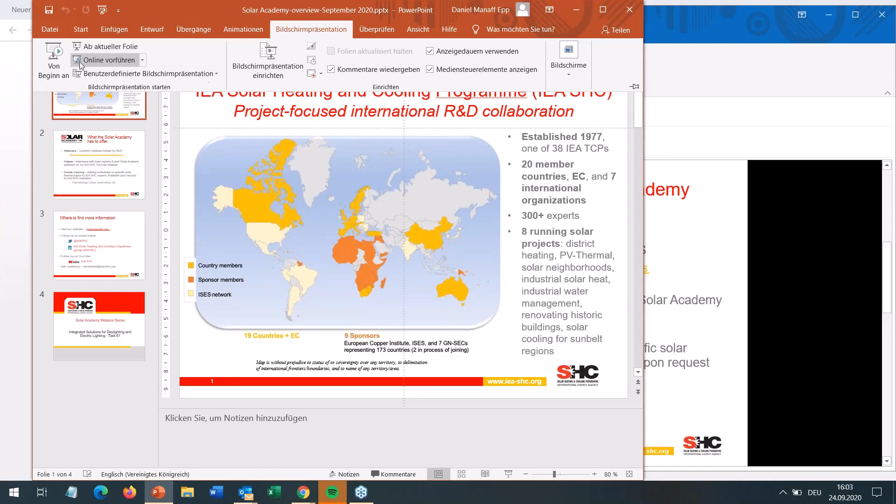The IEA Solar Heating and Cooling Program, SHC, is a collaborative research platform, really huge, with over 300 experts from around the world, from 20 member countries, the EC, and 7 international organizations. We currently have 8 running research projects, and they cover a wide range of topics which are all linked with efficiency and solar energy: district heating, PV thermal, solar neighborhood, industrial solar heat, renovation of buildings, and solar cooling for Sunbelt regions.

What we offer as Solar Academy is regular webinars. They are hosted with ISES. You're hearing one today, and you can find all the recordings of previous webinars under this link. Also, we offer videos on the YouTube channel, which we have done with experts at conferences or around Solar Academy webinars. And we offer on-site training available on request by IEA Solar Heating and Cooling member states—the last trainings were in China, South Africa, and the UK.

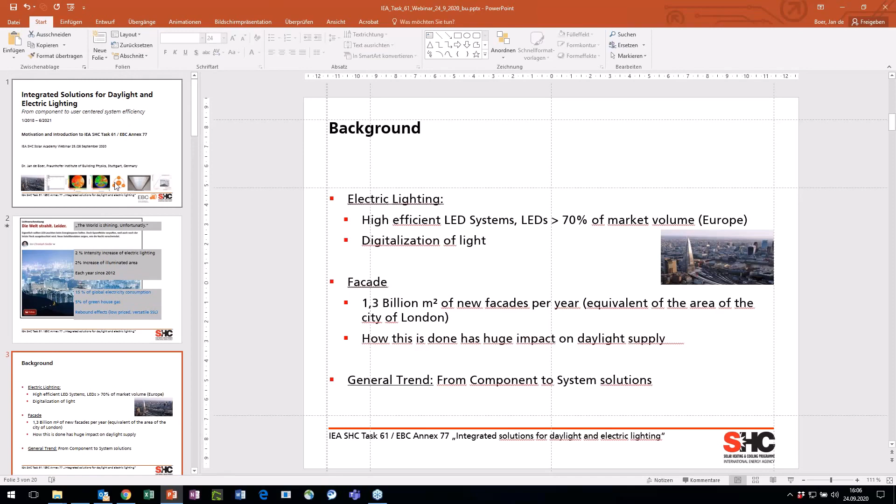Let me first of all start with lighting in a little bigger context, bigger picture. We still, like with other resources, see that lighting consumption is still growing.

From satellite images it's been deducted that we still see huge increases since 2012. One study showed that we have 2% intensity increase of electric lighting and 2% increase of illuminated area on a global scale, showing that this is still ramping up.

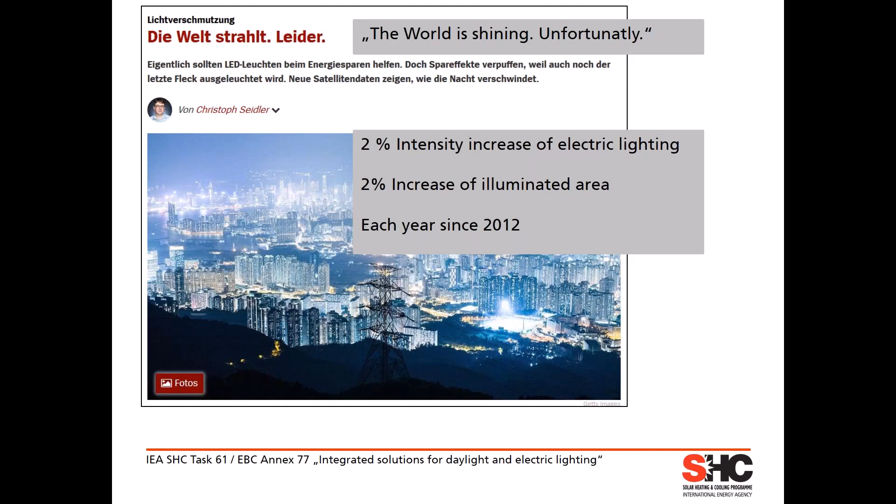We know, relating it to energy consumption, that for lighting we need around 15% of global electricity, and also that lighting accounts for around 5% of greenhouse gases. So lighting and energy efficiency definitely is a topic we have to look into.

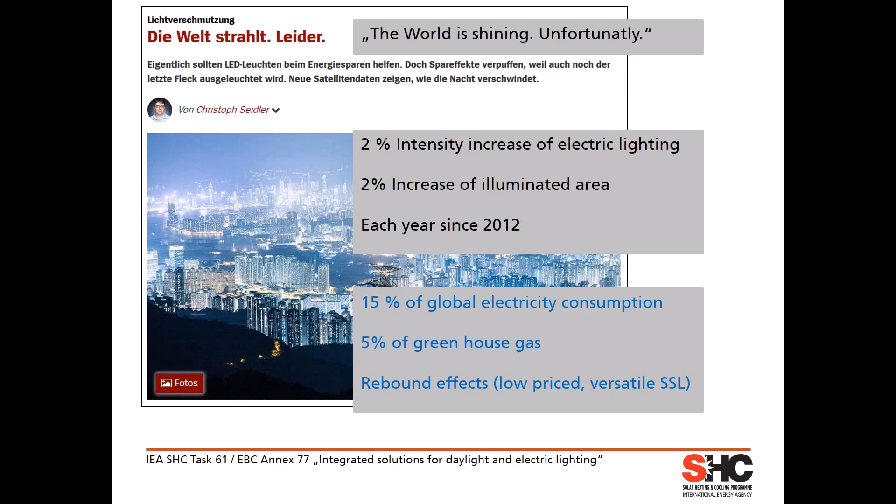Looking a little into the market, we all know about very efficient SSL systems, LED systems now around, but nevertheless we are seeing worldwide effects of so-called rebound effects. Low price and very versatile LED systems are being used more and more, in parts compensating the efficiency gains we got. A little on the background of the markets we are in.

It's on the one hand side electric lighting. We went through a transition of technology here, around 70%, an estimate of market volume now in Europe in LED technology, replacing, of course, older technologies. We have an efficiency boost here, LED systems around twice as efficient as the formerly used fluorescent lamp systems.

And now the next step in electric lighting is very much into the digitalization of light. So you're getting more features, more functionality in parts for less money. It's a very dynamic change and transition we are in here currently.

The other aspect we're dealing with is the facade, and thereby the facade influencing the daylight supply in buildings. The facade market, we have around 1.3 billion square meters of new facade put up each year. That's an amazing number — it corresponds equivalent to the area of the city of London. That is being put into place year by year.

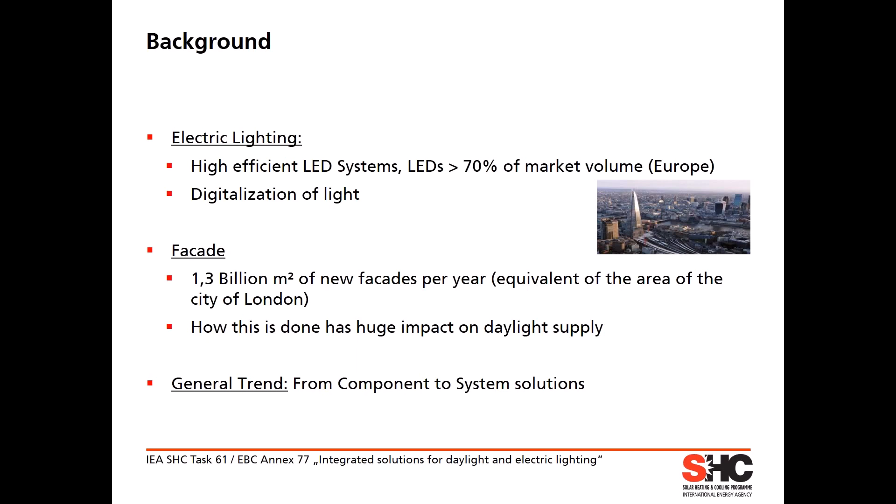This, of course, has a huge impact on the daylight supply and therefore the lighting conditions in interior spaces. Generally, we see the trend that we are moving from component development more into system solutions, trying to optimize the integration of different components.

That is bringing us basically to the topic of our working program that we are addressing here: open issues in the integration of day and electric lighting. That is addressing user aspects, it is addressing energy efficiency of these combinations, it is addressing the technology side, and also market aspects for industry, but also for design practice.

Just to give you a couple of ideas which we addressed in the beginning of this activity to have a closer look into, is definitely the side of the user perspective. We are seeing changes in design and control parameters as we are understanding better and deeper that we not only have to meet visual but also non-visual effects.

When we're designing lighting installations, we have to tailor lighting systems to different ages of people, of users of spaces, and this of course then has implications that we have different and additional targets in lighting designs.

For instance, we might see higher illuminance levels part of the time in the future in indoor spaces. That goes along with the question of whether we necessarily need higher energy demands and consumption for this, or if we can solve it smarter by, for instance, using more daylight.

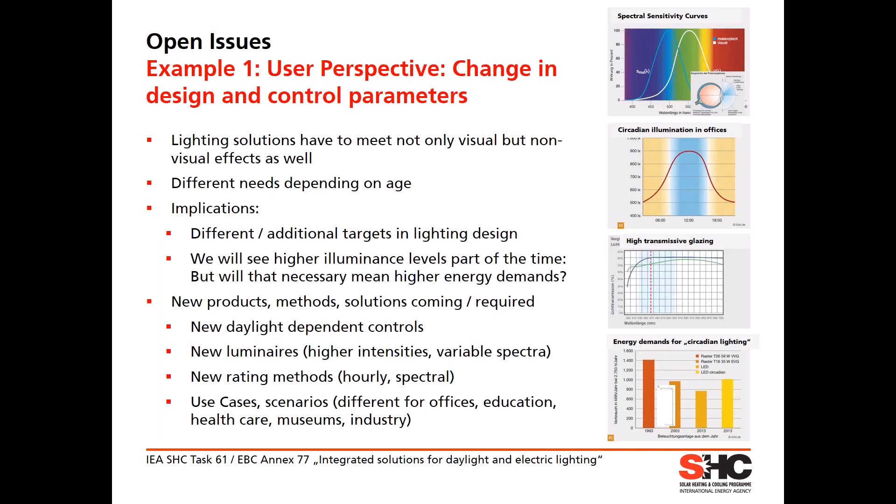It has implications on new products, methods, solutions coming up, new control strategies, new luminaires, or also new rating methods we are seeing coming up.

Another issue is the integration of lighting environments in indoor spaces, bringing together the light coming from the facade through the sun shading, through the glazing systems, with electric lighting.

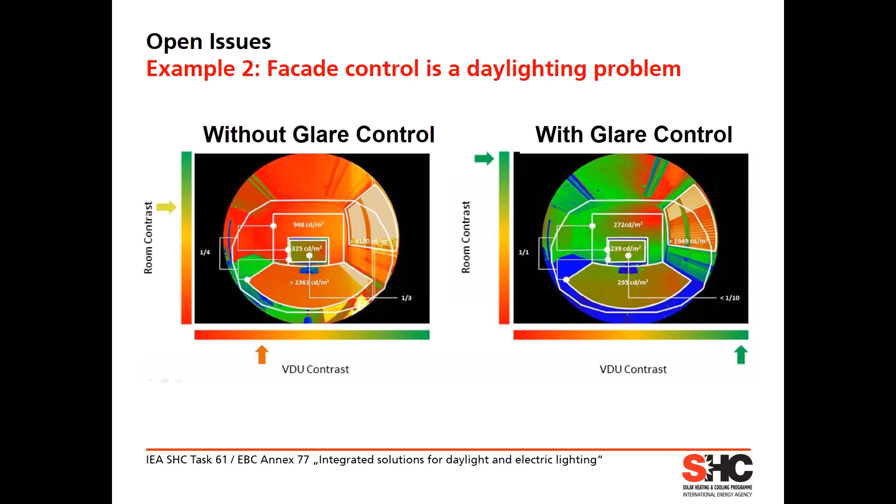That has up to now very much been driven from the facade side by solar controls, and lots of studies show that when people are actively doing something with switching their facades, their sun shading systems, they are doing it for lighting reasons and not for thermal reasons.

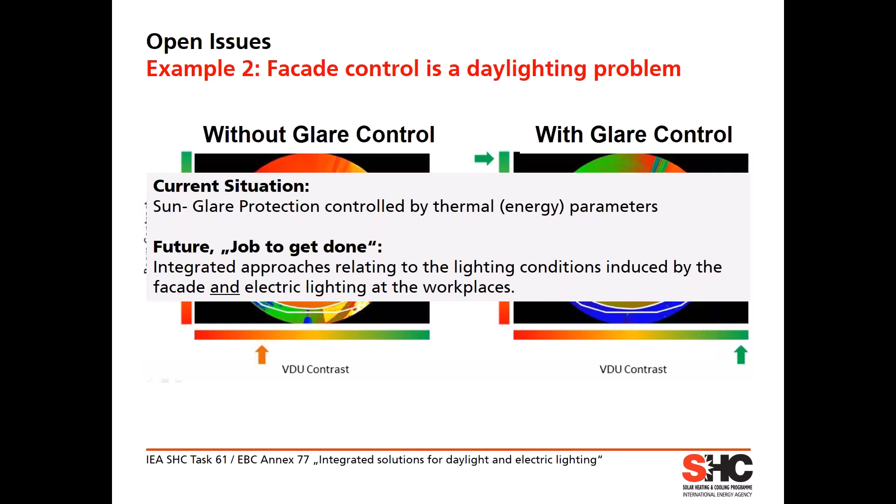So the job to get done is to integrate these approaches better and bring electric and daylighting aspects better together at workplaces. The third issue is on the technology side.

Today we know that we are having technically quite many solutions at hand. Almost everything is technically possible, but will that be accepted? So the key question here is: is the technical complexity also increasing the efficiency?

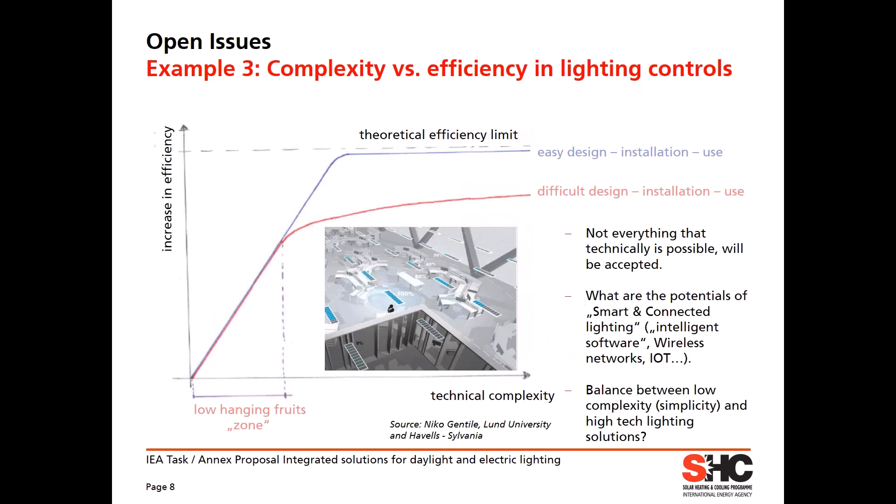If we're having a difficult design, difficult installation, and difficult use due to not really matched technology, will that be in the end maybe more efficient than something very easily designed, installed and used? So in the end, something very simple could be more efficient and better accepted. We think that is worth looking into.

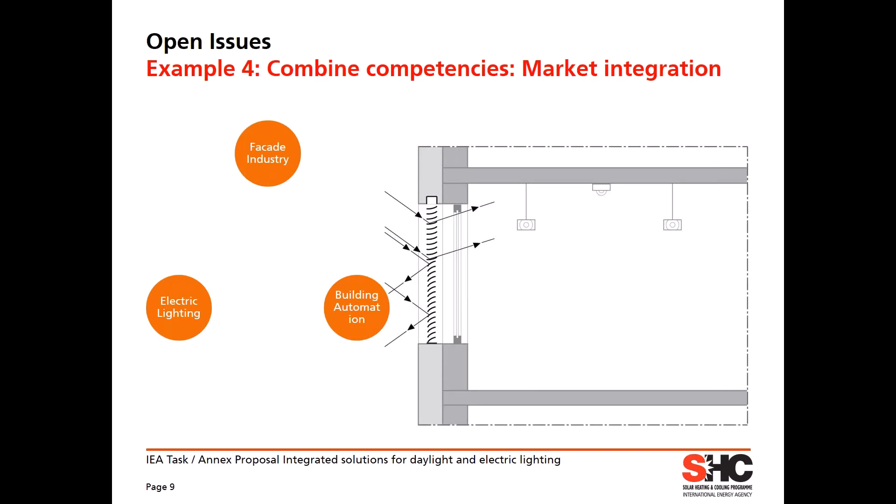Another aspect is on the market side. We are having different industries involved in lighting. That is, of course, classical electric lighting, the facade industry, and building automation.

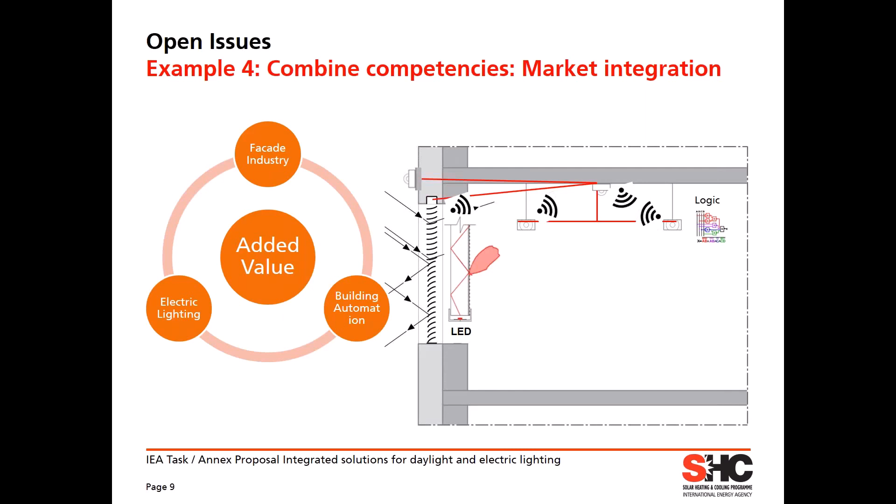We see in buildings more and more components being connected. We're seeing new function integration, for instance in facade, not only delivering daylighting but also delivering electric lighting. We think that if we bring these different trades and industries better together, we can generate quite some added value. In addition, we have to bring it into the design processes, up to the desktops of practitioners, and also put that in the context of national regulations.

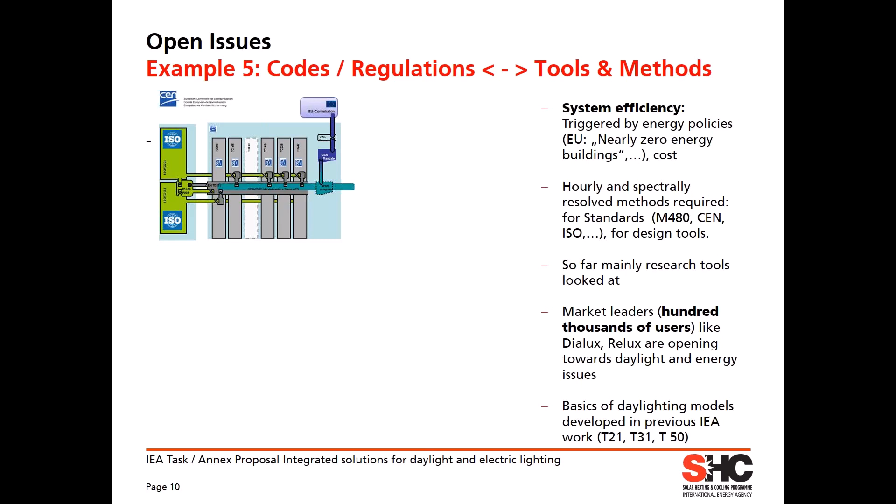There's quite a bit going on at EU level and national level, trying to bring down energy consumption as a whole. Standards are important for that, so we think it's worth developing standards further, better connecting daylighting and electric lighting aspects, for instance having methods rating things on an hourly basis. Also important is the improvement of design and rating tools, possibly including the market-leading simulation tools, closing gaps which still exist on the daylighting and lighting control sides.

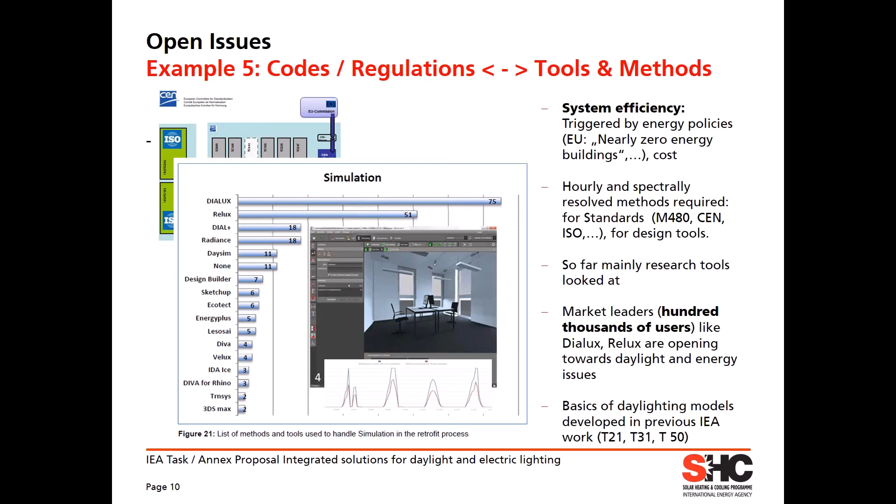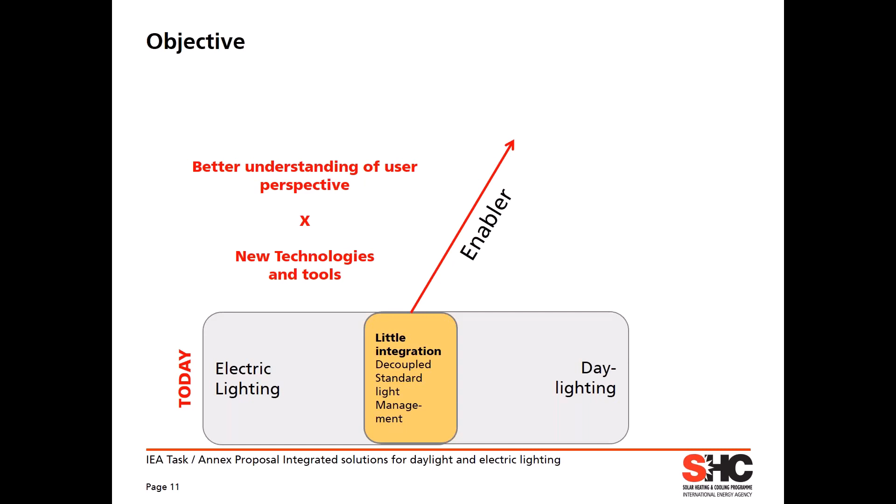So that's another aspect we're looking at. Altogether, we're trying to push the integration of electric lighting and daylighting by using these enablers: better understanding of perspective, and new technologies and tools. We hope that with our program we can contribute a little to higher integration of user-centered lighting at high system efficiency, implementing daylight as a template for electric lighting solutions, and also linking market and industries better.

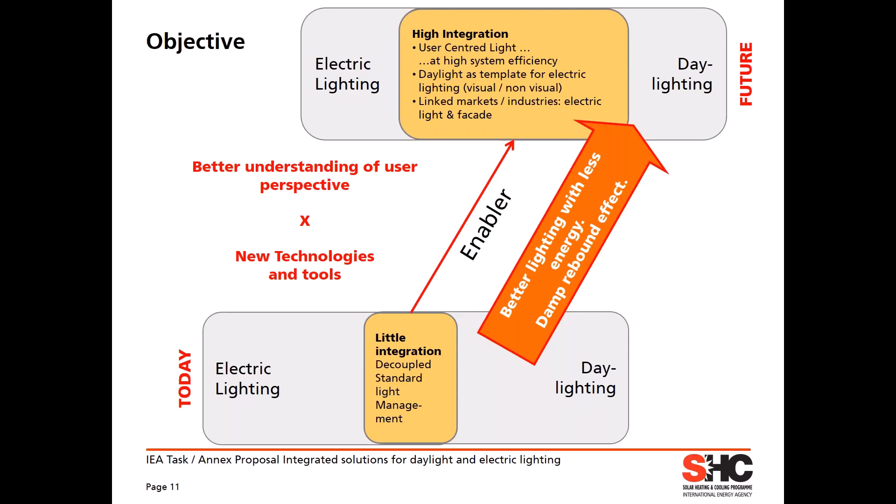In the end, we're hoping to give a little push at least for more energy efficient lighting and damping these mentioned rebound effects. The task structure we've given ourselves is basically four main projects.

Subtask A deals with the mentioned user perspective and requirements. Subtask B is on the technology side, integrating and optimizing daylighting and electric lighting. Subtask C deals with tools, design support, and design workflows for practitioners. And in Subtask D, we're doing validation in demonstration projects, lab and field study performance tracking.

That's all cross-connected by two activities: the development of a new evaluation and rating method for integrated lighting solutions, becoming part of an ISO standard, and also going into widespread lighting design software, and a VR-based decision guide, on which Mark is going to talk a little deeper in one of the next presentations.

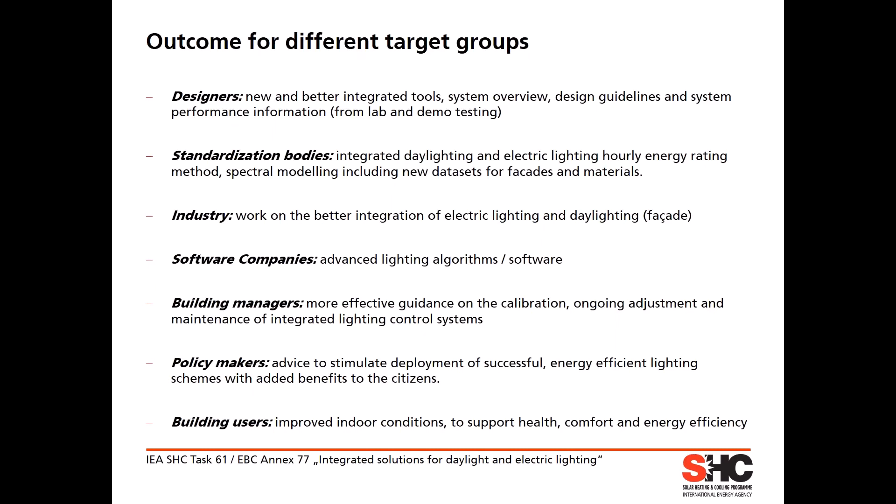In the end, we are producing results and publications for different stakeholders: designers, standardization bodies, industry, software companies, building managers, and policymakers. Hopefully, for building users we can improve indoor conditions, support health, comfort, and of course energy efficiency with this program.

To give you a brief idea of who is behind this activity, as Bärbel mentioned, it's a quite big research group of around 35 experts from 14 countries, coming from research institutes and industry at the same time.

We have early publications out, for instance a position paper on the use of daylight in non-residential buildings, giving indications of actions eventually needed for governments, NGOs, and the private sector.

We have the first reports from the research program out now. More are coming up during the next year as we're in the final year, and also a newsletter is available. If you're interested, you're cordially invited to follow us on the website of Task 61. The publications coming up will be available and downloadable from this site.

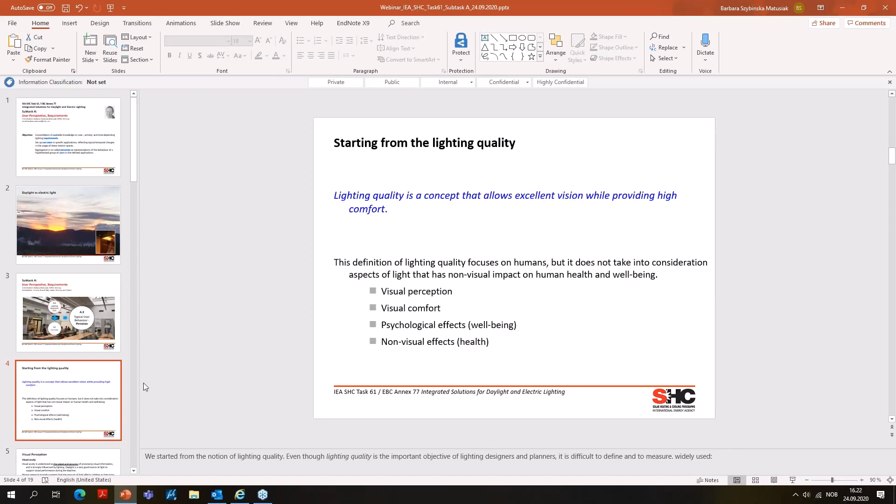So what we learned so far from the research studies: visual acuity. Recent research strongly suggests that the amount of light affects children as they grow and determines whether they will develop myopia or not. Myopia, or short-sightedness, is the most widespread visual disorder affecting young people. It has reached an epidemic level in Asia and is increasing everywhere. Some studies refer that the risk of myopia is lowered by exposure to daylight and increased by activities performed at short visual distances, close-up work. A person with little exposure to daylight has a 5-fold risk of developing myopia.

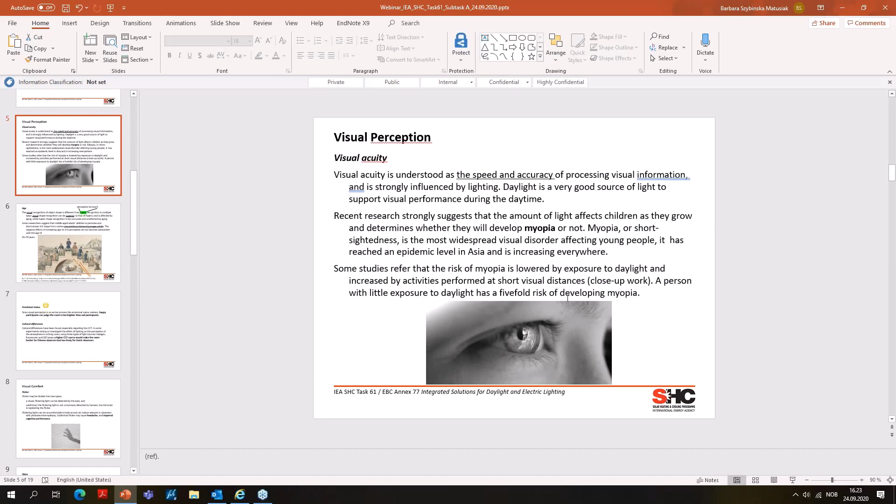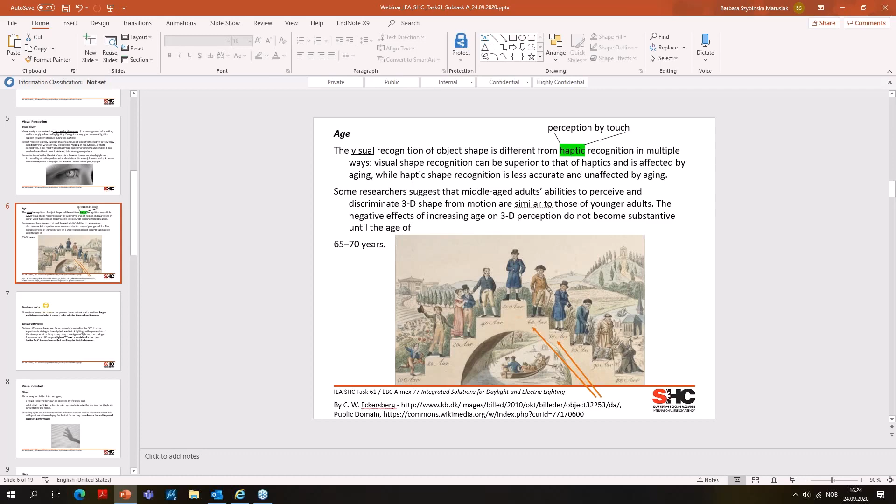What we learned about age: the visual recognition of object shape is different from haptic recognition in multiple ways, and visual shape recognition can be superior to that of haptics, and it's affected by aging, while haptic shape recognition is less accurate and unaffected by aging. Even though some researchers suggest that middle-aged adults' abilities to perceive and discriminate three-dimensional shape from motion are rather similar to those of young adults. So the negative effects of increasing age on 3D perception do not become substantive until the age of 65-70 years.

What about emotional status? Since visual perception is an active process, emotional status matters. Happy participants can judge the room to be brighter than sad participants. And we found cultural differences, especially regarding the color temperature of light.

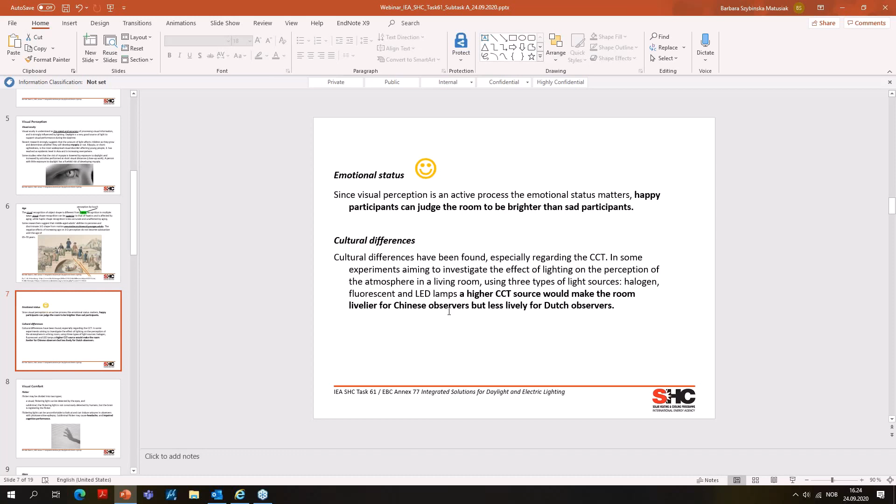In some experiments aiming to investigate the effect of lighting on the perception of the atmosphere in a room using 3 types of light sources, a higher color temperature source would make the room livelier for Chinese observers, but less lively for Dutch observers.

Flicker may be divided into two types: a visual flickering light can be detected by the eyes, and subliminal, where the flickering light is not consciously detected but the brain is registering the flicker. Flickering lights can be uncomfortable to look at and can induce seizures in observers with photosensitive epilepsy. Subliminal flicker may cause headache and impaired cognitive performance.

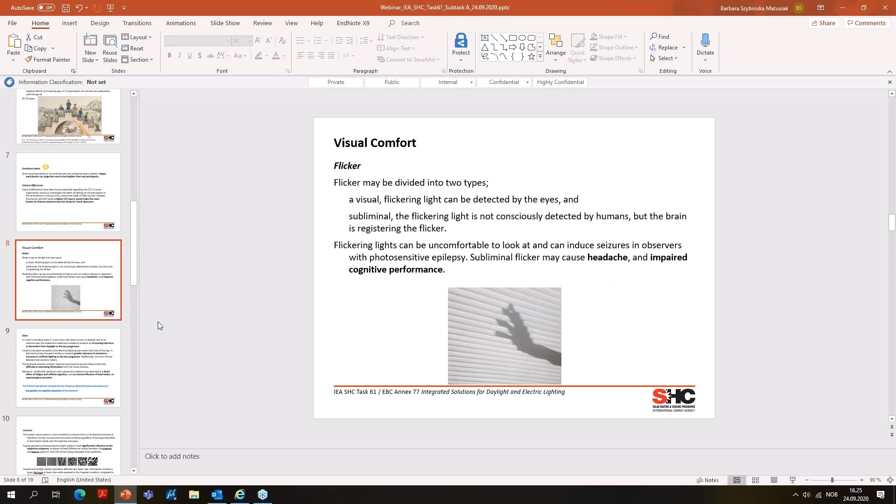Glare: in a semi-controlled study in a test room with direct access to daylight and an external view, the researchers detected a tendency toward increasing tolerance to discomfort from daylight as the day progressed. It seems that glare sensation from electrical light also varies with time of day. A laboratory study showed a tendency toward greater tolerance to luminance increase in artificial lighting as the day progressed.

Additionally, the time interval between sessions matters. The temporal variation of glare response was also found to be influenced by the difficulty of extracting information from the visual stimulus. Moreover, statistically significant and substantive evidence was detected of a direct effect of fatigue and caffeine ingestion, and an inverse influence of food intake, on reported glare sensation. The factors that almost certainly do not influence discomfort glare perception are gender and optical correction.

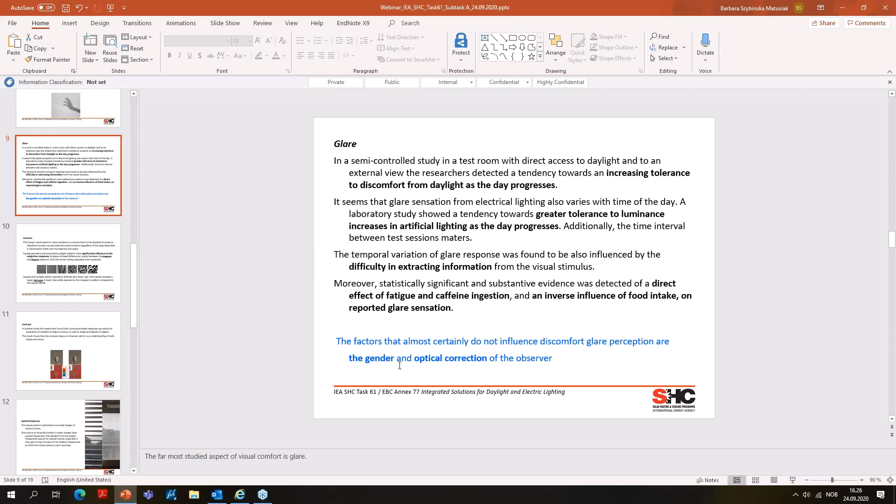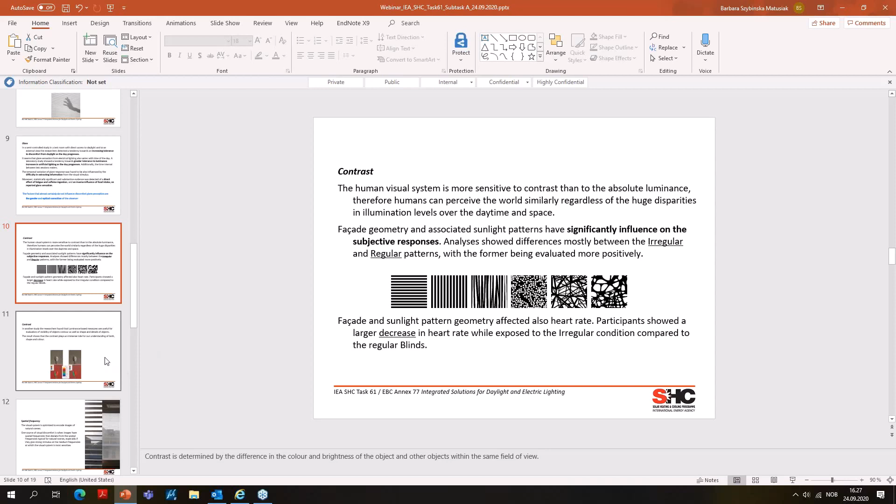Contrast can be measured by luminance ratio, and we can look at spatial frequency. The visual system is optimized to encode images of natural scenes. So one source of visual discomfort is when images have spatial frequencies that deviate from the spatial frequencies typical for natural scenes.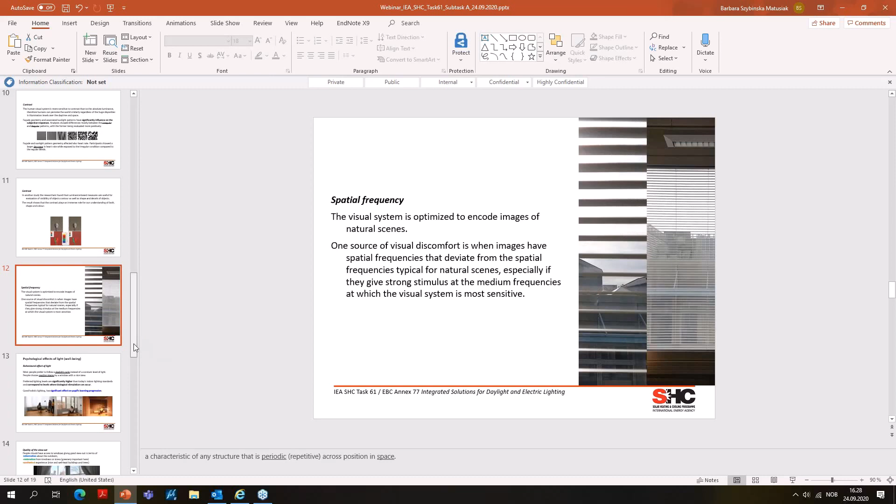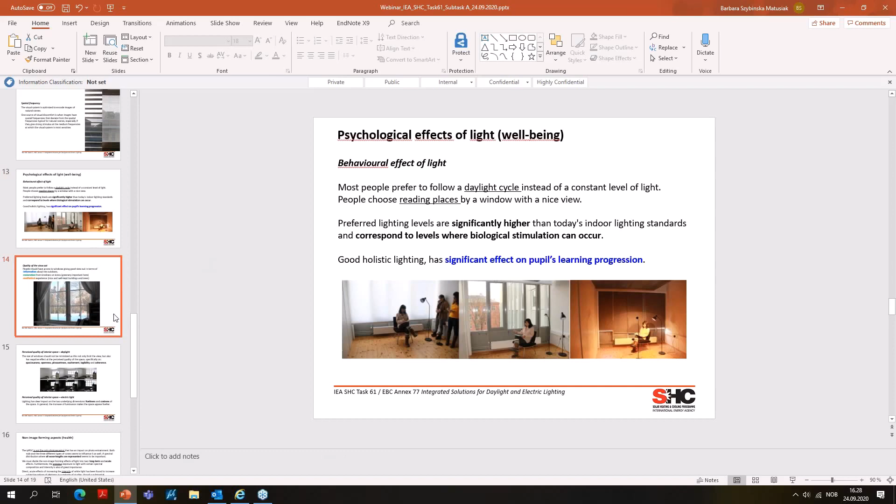And then we can look at behavioral effects of light, how people use it and what sort of lighting they prefer. We can again repeat that people should have access to windows giving a view, because of information, restoration, and aesthetic issues. And the window size should not be limited, not only because of limiting the view, but also because window size has an effect on spaciousness, openness, pleasantness, excitement, and legibility and coherence of the room.

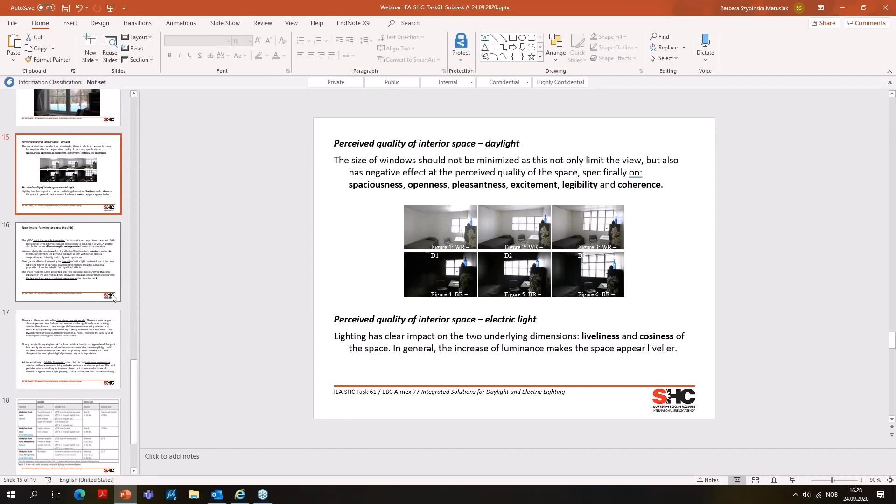I also have a quite long series of information about non-image forming aspects. Maybe the most interesting is that there are differences related to chronotype, age, and gender. There are also changes in chronotype over time. Girls and women seem to be significantly more morning-oriented than boys and men. Young children are more morning-oriented and become rapidly evening-oriented during puberty, while the more attenuated turn toward morningness occurs from the age of 20 years, and it's more stable. And elderly people display a high risk for disturbed circadian rhythm.

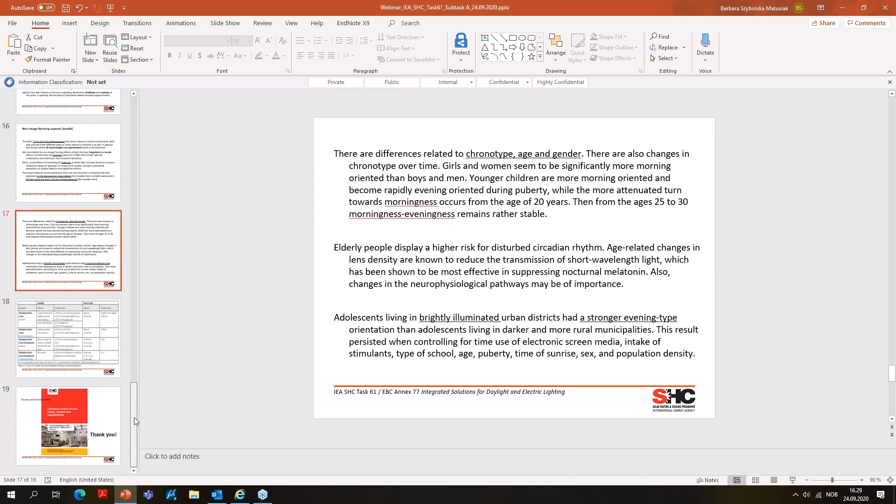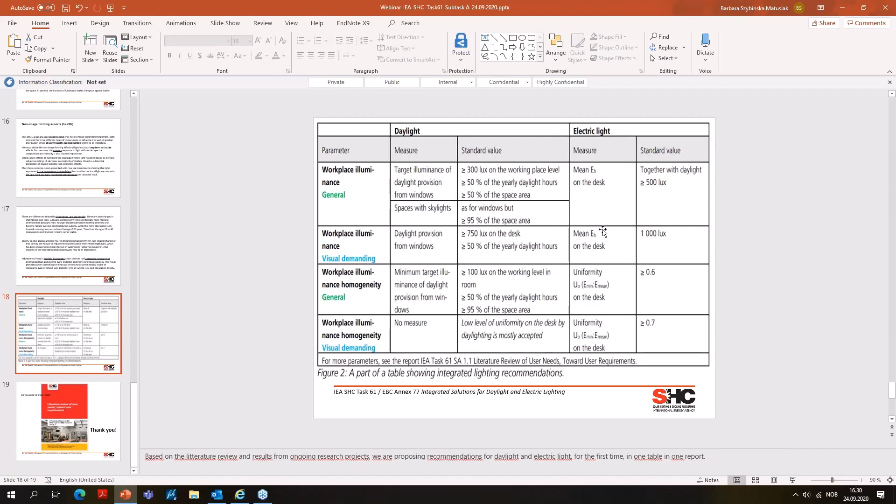So, based on the literature review and results from ongoing research projects, we are proposing recommendations for daylight and electric light for the first time in one publication and in one very long table. A part of the table you see here: we have daylight and electric light, and for example workplace illuminance in general, what are the recommendations here, and for electric light as well, for visually demanding tasks, and so on. So I recommend this if you would like to know more about human needs and recommendations.

So the report, which we call A1, will be published very soon, probably already in October. Yes, thank you very much.

Great, thank you, Barbara. Very impressive, very nice to see lighting and health being linked by researchers, and even looking into gender aspects. Thank you very much.

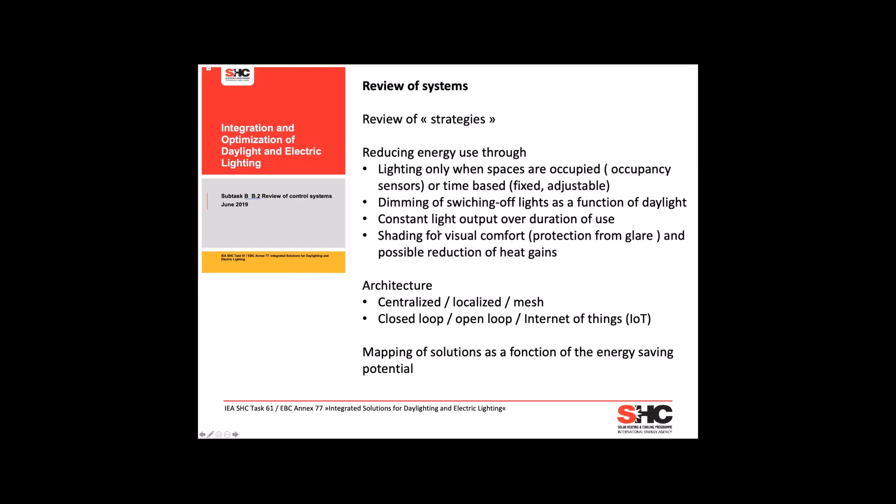I don't want to cover all that. I know some of you, or most of you, are expert in that. So you know the supply is impressive, from centralized system, closed loop, open loop, to the type of sensor you're using.

We're also reviewing the market structure, depending if it's residential or non-residential, which are very different markets for the application. And you have drivers like in individual buildings, very much related, for example, to security issues. Often it's much more related to heating problems, overheating, whatever, and lighting is just a second aspect. So it's hard to really fully link the control technique to only lighting quality. It's a bit more global in buildings.

We also see movement and changes, a lot of protocols of communication, and this shows that lighting control is part of a more global system. Often if you have a very well developed BMS, the lighting control is only part of it and could be cheap with few sensors. So you have a whole range of control, from fully dedicated to lighting to completely integrated in BMS.

And now with the data architecture coming into buildings, data systems like PoE, Power over Ethernet, can even light the lamps. We have two IEEE standards on this, PoE 100 watt system, and also the single pair approach, which we expect will also put price down for controls. We see some initiative for DC powered lamps, 48 volts, which allows transformers to be centralized and not from every light source. New sensor systems and chips with geolocalization can really adapt lighting to your area.

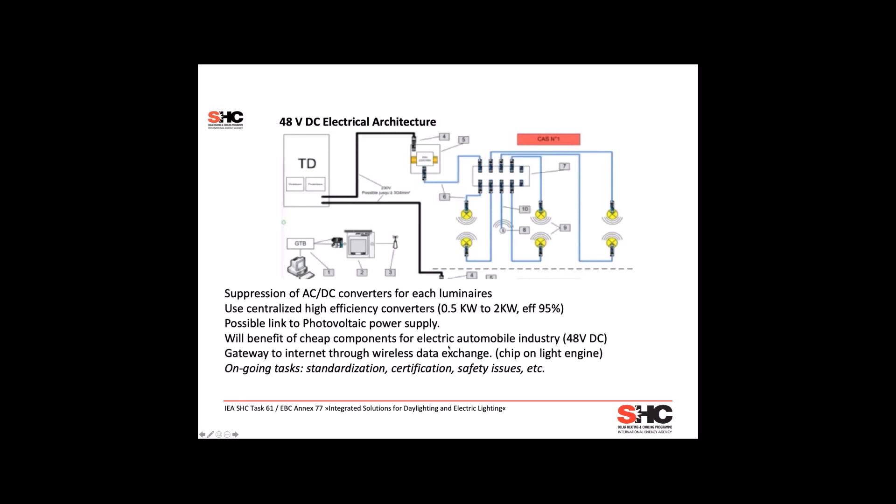I don't want to go too much into all this new proposal of architecture, but it's moving. I think some of you are probably involved with photovoltaic systems, and photovoltaics produce DC current, usually rather high voltage, but there are a number of actors that think part of the building could be powered with DC power. We also see a push from companies working for the automobile industry, especially electric cars, with components that may move to the building from the car industry. So we're checking that very important evolution which is happening.

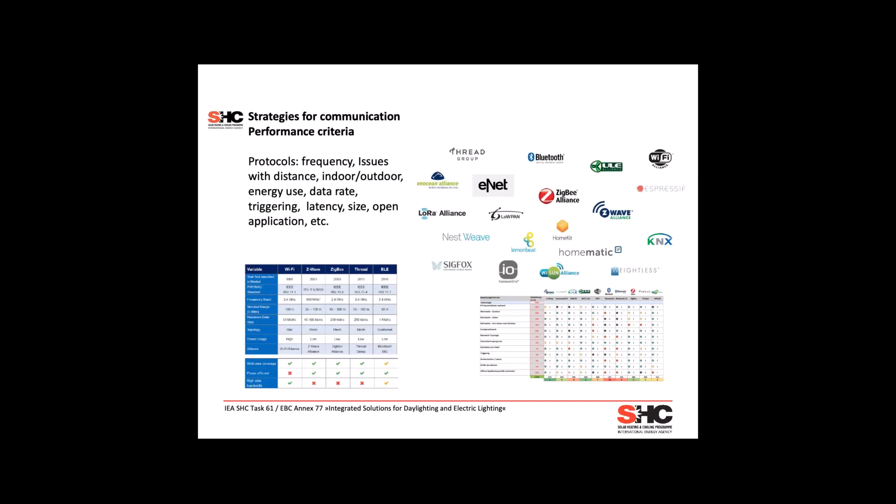We looked at a number of performance criteria of all these systems, the protocols, with their advantages and drawbacks. We also looked at future trends, based on an analysis of value creation. Part of these lighting control systems are basically solving problems today, and part of them are also creating new values, new functionalities, new opportunities to run this better. This is something we have absolutely identified, and it's impressive to see how the market is pushing for development of new systems in a global manner.

Having a talk recently with people working in the car industry and the electric car industry, which is very much driven partly by software development, you could see that software is now moving into this lighting control business to make things versatile, practical, remote control, flexible. I have a number of terms here, and that's something we look at and we report on in our next report, on B3 and B4 actually.

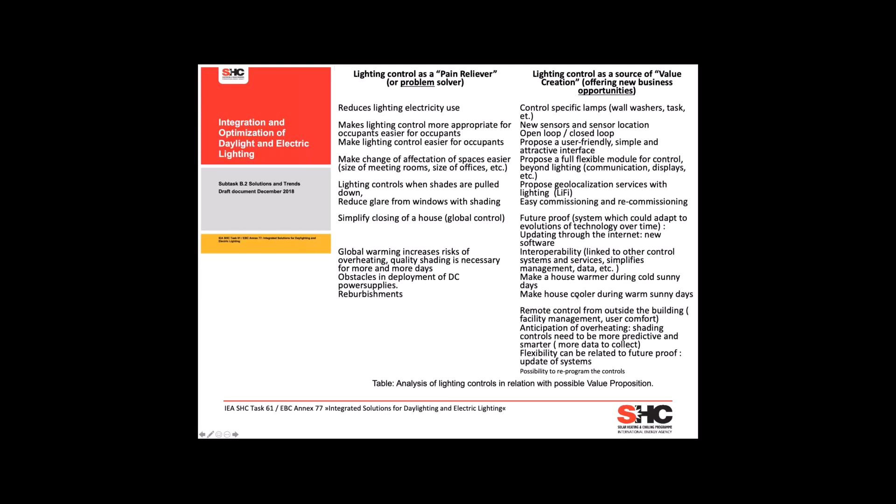We are covering user interfaces, which is impressive what is happening.

It could simplify the world, making a global management of buildings, hospitals, schools, commercial centers, or your home more practical, but we're also very concerned by the robustness, the simplicity, the commissioning, and the maintenance. Components are progressing, are being shared, and we check the trends on that.

We try to really look at what the systems are really doing for energy savings, because the motivation is often very far from purely energy saving. So we want to inform the readers about the potential on that.

We see something which is not so developed - combined control of lighting and daylighting is not really the core of this development, but we try to grab the systems that allow doing both. And we look at the evolution of motors, of shading systems, and electrochromic glazing, and the way they could be combined.

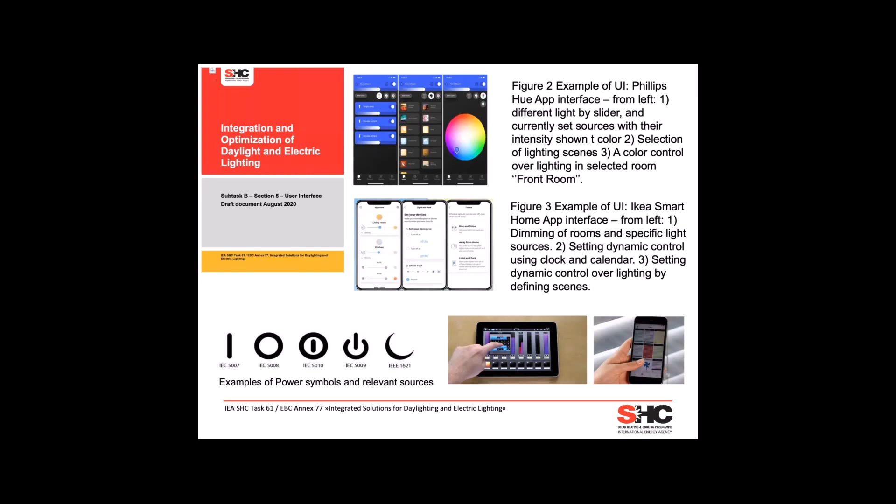We have global issues regarding that. We need to finish this document about lifetime. The model of lifetime is very important because we are talking about systems with different lifespans - the control has a life, the drivers have a life, the lamp has a life, the luminaire has a life, and we are addressing this in the report too.

Finally, we have a report on standards, because there are relevant standards, new standards being developed, and we also identify needs for new standards.

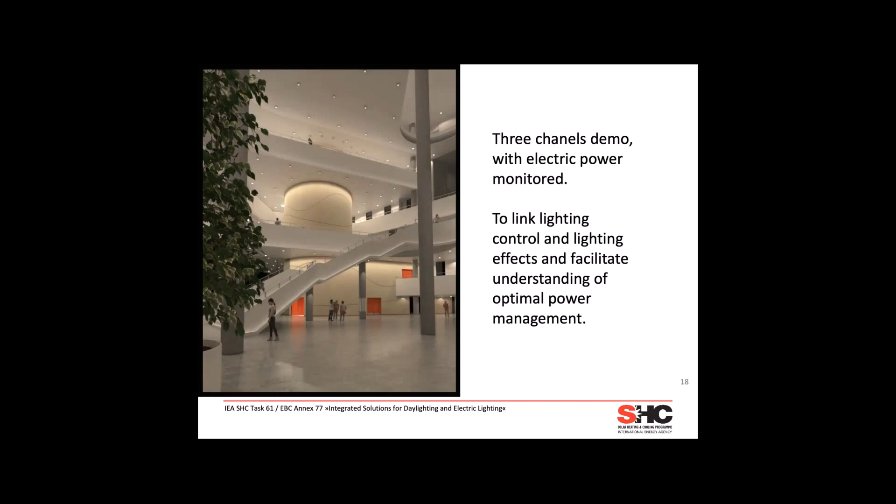I think I will have, if I could play this on my screen here. I hope you can see that on my screen. Do you see my screen? I hope so. Maybe not - yes, no, we see your screen, yes. You see your screen, okay.

So you see, you can vary the daylight in the room. We have different lighting scenarios. You can play up and down, and you can simulate actually graphically a number of lighting control systems. We plan to have a number of lighting control systems demonstrated on the website of the IEA Task 61.

Okay, this is where we are now - 5 reports. Some of them are coming soon, and we hope you will be delighted to have them and review them. Thank you very much.

Mark, thank you. This was a very engaged presentation and very impressive work. I think it might be 500 pages of technical insights on new lighting technologies. Very well done.

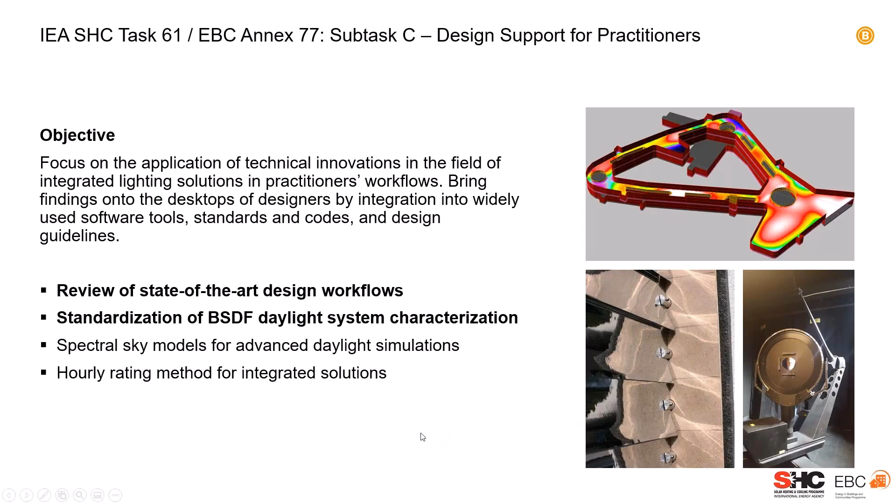So I'll give a short overview of the design workflows and the daylight system characterization topic. For the design workflows, in that state-of-the-art review, we first defined example design projects to give the reader an overview of how such systems, such buildings, such architectural designs can look like, and how the lighting design with integrated solutions for electric lighting, daylighting, and controls can look like, and what different applications can be.

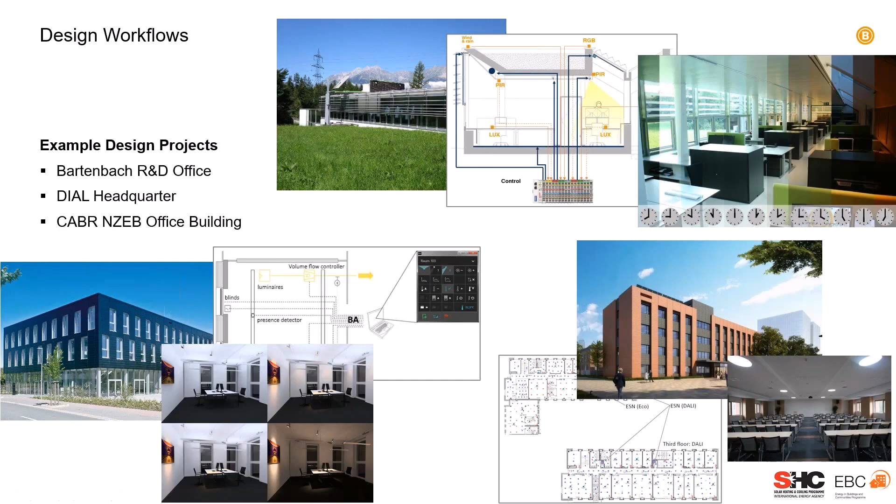So we have three different and very nice examples in there: our R&D department here at Bartenbach in Aldrans, the office building from DIAL in Germany, and the building of the Chinese Academy of Building Research, the Net Zero Energy building in Beijing.

In a second step, we gathered inputs from different groups and people joining the group about the workflows used in practice, as well as proposed workflows in standards or from public entities. For example, we have workflows that we use here at Bartenbach, workflows used by Norconsult at Inform Design at DIAL, but also workflows described that are standardized in the ISO standard 16817, or, for example, proposed by the German LiTG in their scope of services.

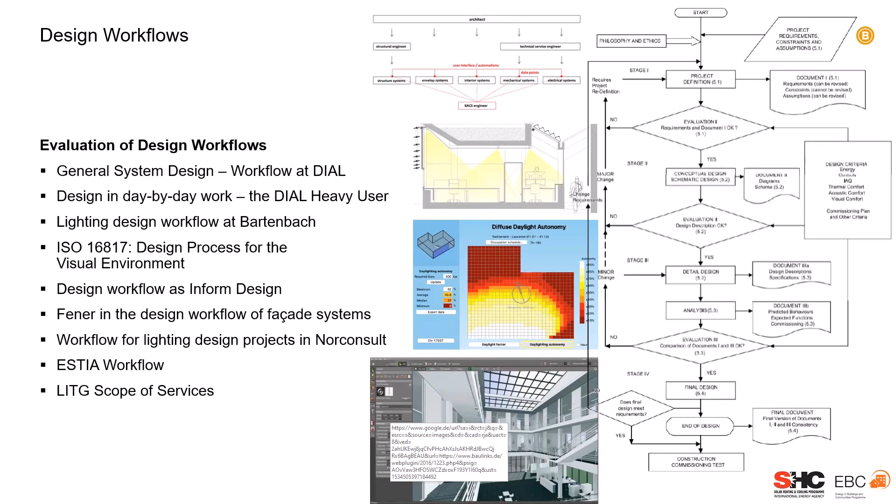Today, all design process and design workflow is tightly connected to simulations, which are either for evaluation in the end, but also often in the design process itself - if we think of parametric design, for example, as an important means of design nowadays. We also took the time to compare and put them next to each other and checked the different features that design tools provide.

There are quite a number of software solutions out there which can be used for designing daylighting and electric lighting solutions, and also the controls for these integrated solutions. We did that for different aspects used in the design process and necessary for it. We summarized general information, which kind of user group is addressed with one tool or the other, in which design phase they can be used, and so on. So we put them next to each other and got a nice overview of the current situation in terms of software solutions.

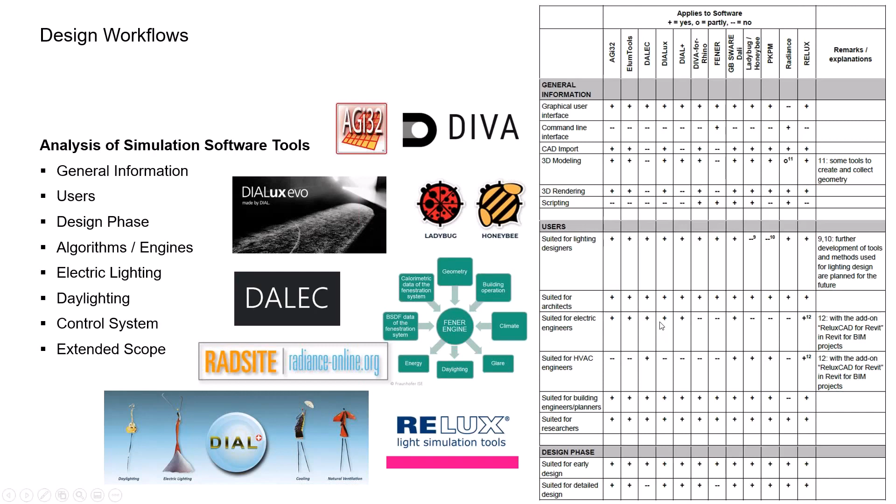All that is put together in a report that is already published, that is already out there for all who are interested in more depth. It's more than 100 pages of information about the currently used workflows and software for the design of integrated lighting solutions. You can find it, under its title, on the webpage of the IEA Task 61.

My second topic that I would like to dig into is the characterization of daylighting systems. If we talk now about simulation capabilities, there are some tools out there already working with so-called BSDFs, which are a possibility to characterize daylighting systems in simulations.

So quickly talking about BSDF, what is it? If you compare the images on the left and right side, they basically show the same lighting distribution in the room. The only difference is that on the left side, the facade system, the Venetian blind system in here, is represented by its geometry and material characteristics directly. On the right side, the overall fenestration system is represented by its BSDF. So it's a possibility to have a representation of a daylighting system that can be used in simulations.

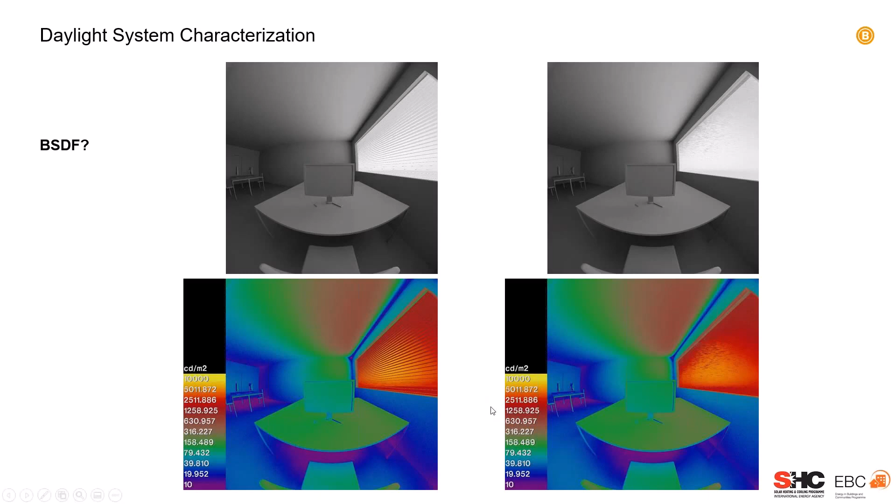So if we think about that, why do we need that? If we think about a very different area, as an example of cars, there's the certificate of conformity, which exactly describes how the technical characteristics of the car are.

We do have the same for electric lighting. We do have IES or Eulumdat files that describe exactly the lighting distribution from that luminaire that we have. And the same thing we do have with BSDFs, but we don't have a real standardized format for these kind of data yet.

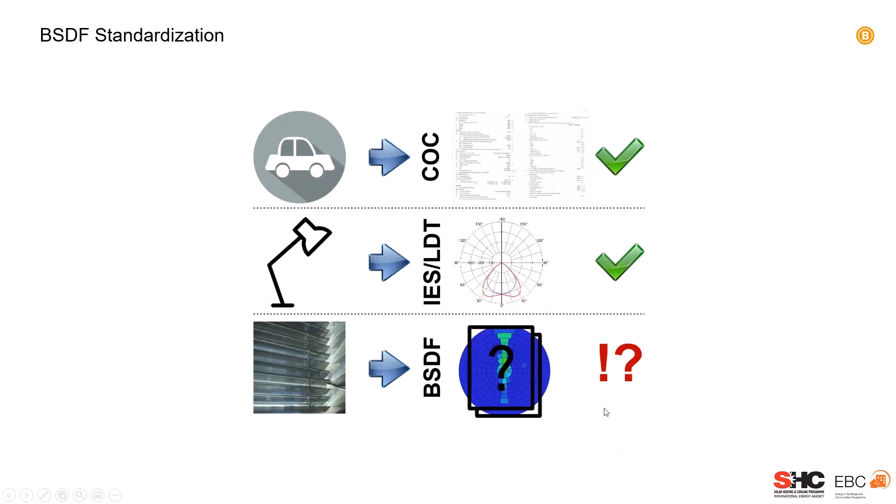The other thing I also mentioned is that for electric lighting we do have quite some simulation tools and possibilities to do proper simulations. For daylighting systems, there are still quite some questions, and it did not find its way into the widely used software systems yet.

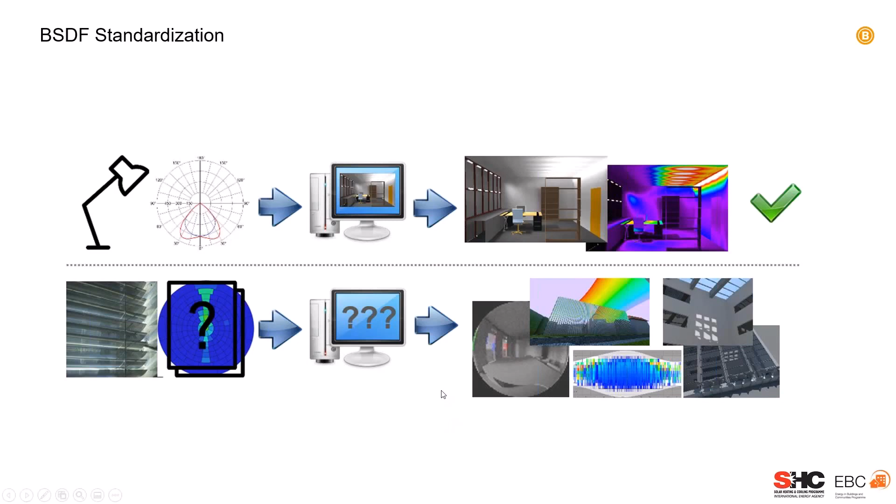So what did we do within the task so far? One thing we did is a sensitivity analysis to find out what is the necessary resolution of these kind of data sets for different kinds of systems and applications. For example, if we want to do an illuminance calculation, finding the overall lighting inside the room, we will need a different representation than if we want to do a glare calculation.

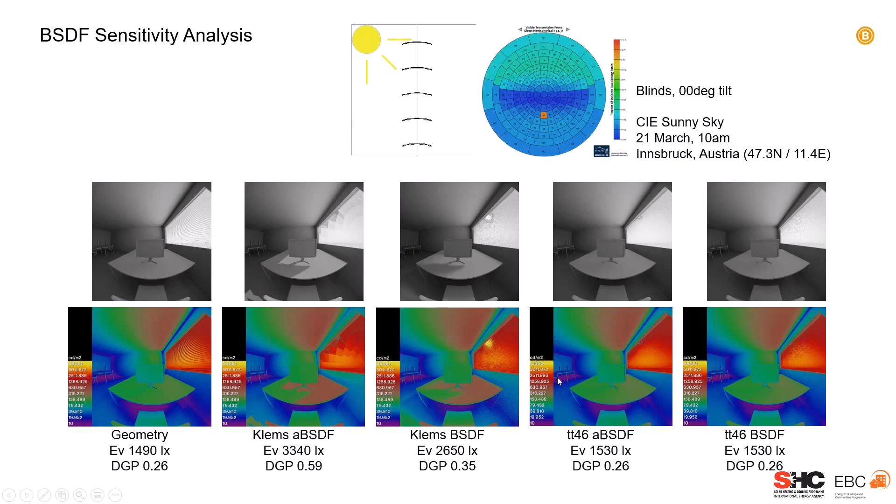A glare calculation is based on the luminance distribution directly seen at the window. So we did a sensitivity analysis on that to find this out for different kinds of systems, for blinds, for fabrics, for clear glazing, and so on. The overall aim is then to derive what is the right and necessary kind of data set that we need for the different kinds of systems.

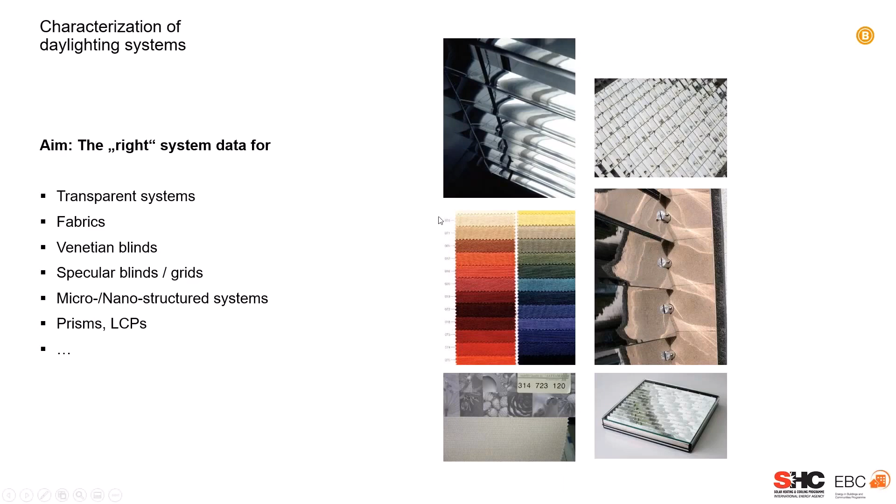So for example, for transparent systems, for redirecting blinds, for these kinds of micro shades, for fabric, for textile roller shades, and so on. This is an important step towards bringing that into practical work, as we need to inform industry which kind of data sets and which resolution they should provide to the designer, so they can properly include the systems already in the design phase and do proper simulations for any application, whether illuminance or glare calculations or whatever.

So our aim in the end is to come up with a proposal for different classes of systems. This is now work in progress. We do have, for example—I took out this example—diffusing general Venetian blinds, which are widely used, especially in Europe.

As I mentioned, for different tasks, for different metrics that we want to evaluate, we will need different simulation methods on the one hand, and these are then tightly connected to which kind of data sets and which resolution of the data set we need to put into that model.

David, your two minutes are now starting. That's good, there are two more slides to go.

So this is work in progress. We're putting these kinds of tables, this kind of information, together for the different classes, for different typologies of daylighting systems.

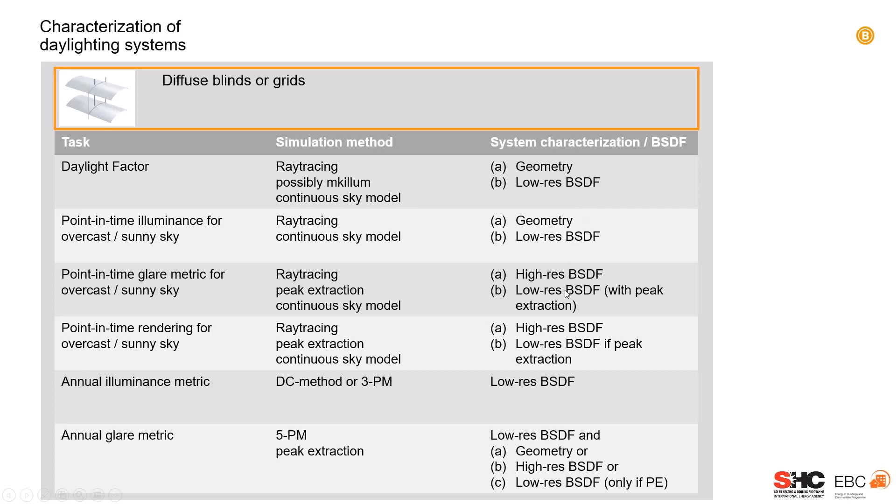As I said, this is currently work in progress with the experts joining here in IEA Task 61. We do have quite a number of active participants from all around the world, from the USA, Switzerland, Germany, China. They're following partly different approaches in the way they measure and generate those kinds of data sets.

But in the end, we are trying to put all these together to propose a good way and a good working possibility to come up with these kinds of data sets, and to propose to industry which data sets for daylighting systems to bring this kind of data also onto the workplaces of practitioners.

So we are currently working on this white paper. It is in a quite good stage already, so it will be released soon. We're currently having our IEA meeting in parallel, discussing the last changes to that white paper. So stay tuned, it will be online on the Task website as well—very soon you'll find it there.

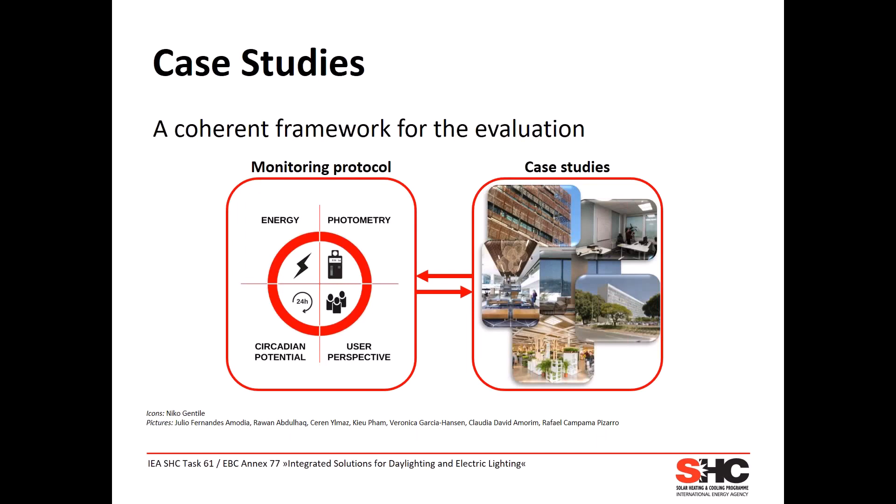Which are the case studies then? We have a long list here. It's a bit dynamic because we are looking at real occupied buildings, so in these times it's sometimes a bit difficult - there are projects coming in and some going out.

In general, we have a quite nice geographical spread. We have an overrepresentation of offices, but also healthcare buildings, educational buildings, some living labs, and retail sector. We have a number of solutions used here, like daylight harvesting systems, open loop, closed loop, granular lighting controls, electrochromic glazing, some special shading devices, low-cost solutions in listed buildings, and perforated facades - I'm surely forgetting something.

Interestingly, one of the solutions more used in the newest buildings and projects we have is integrative lighting - a lighting system that is able to change in intensity and color throughout the day in order to support the circadian rhythms of individuals.

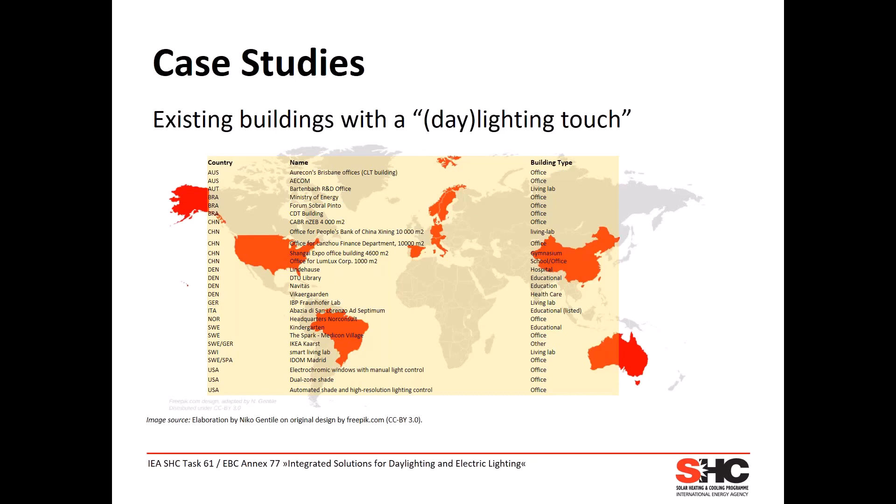And how do we evaluate that? We have different techniques, and one of those is to try to log the individual intake of light in terms of both intensity and spectral power distribution. This is best done with wearable devices. In some projects, we were able to get that.

Werner, in particular, could test different devices that are now available on the market, and he will provide some lessons learned and experience from using different devices. So Werner, the stage is yours.

Hello, I'm going to talk a little bit about these different wearable devices that we have investigated. We do this to link people's well-being with integrative or circadian lighting in order to understand what people are exposed to during a particular day and how that might support their individual well-being. This has to do with both the visual and non-visual aspects of lighting, but also some of the emotional aspects.

During the day, a person is exposed to different lighting conditions, whether it's at home, in the office, or anywhere else outside in the buildings.

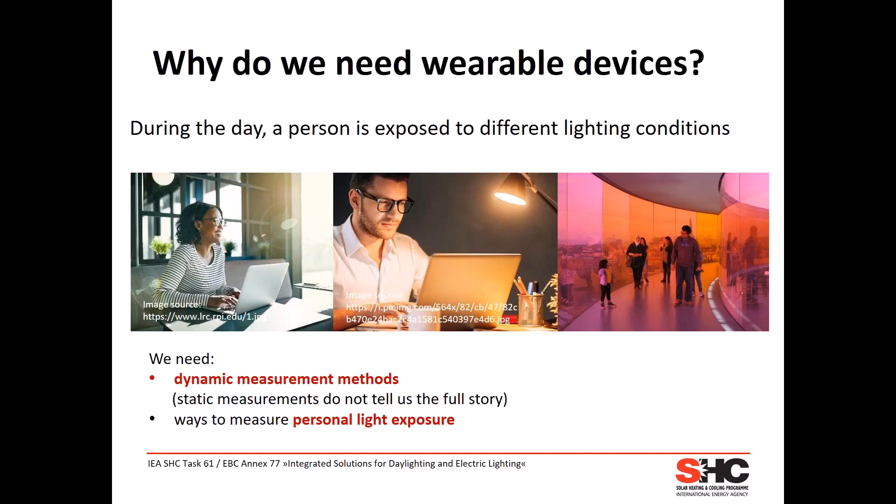We need some dynamic measurement methods in order to evaluate personal light exposure that a person experiences during the day. What do we need in order to understand that exposure?

Because the spectrum changes depending on the lighting conditions, we need to understand what the spectrum of the light source actually is, and how that spectrum contributes to our health and well-being. We also measure the photopic illuminance, the normal lux levels, and try to understand the different wavelengths if necessary as a compromise if we can't get the full spectrum of a particular light source.

And we want to correlate those photometric measurements with other human factors, for example activity levels of people, to see whether it helps them sleep, or if they're awake all night, or whether they can be energized in an office by a particular lighting system.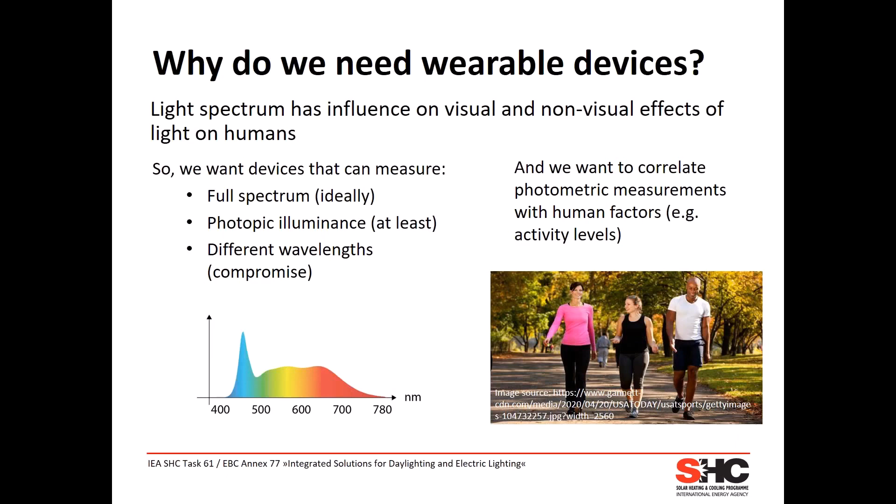We have looked at a number of commercial devices that we have tested in various of our experiments. For example, the Philips Actiwatch, the LYS button from LYS Technologies, and the Movisens light sensor. You'll find links to the different websites at the bottom of the web page.

We've also looked at some research devices like the Daysimeter developed by the Lighting Research Center in the US, or LuxBlick, developed by people in Switzerland and Germany. There are likely others out there, but we have used the ones on the left side; the others are not available to buy, although sometimes people are allowed to use them for short research projects. I know Nico's group in Sweden has used the Daysimeter for a short period.

The Philips Actiwatch Spectrum Plus is a little thing worn at the wrist. It's also a clock, and through the little light sensor indicated here it tracks activity, some sleep and wake patterns, the photopic illuminance, and the red, green, blue channels of the light sources.

We used this for some projects, as did other people, for example Markvart's group in Copenhagen. They used 48 Actiwatches and found that the calibration needs to be device specific. It does not come with specifications or calibrations from the manufacturer, so we really need to look at that.

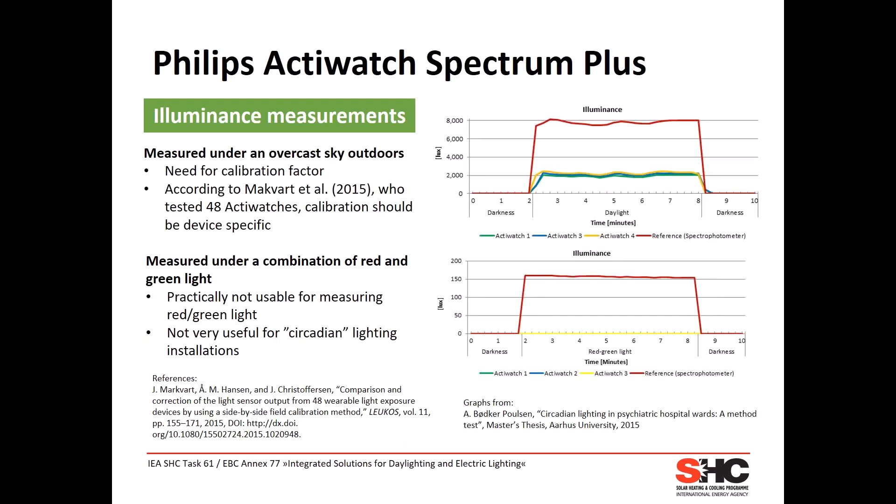Then at nighttime conditions, where we had only red and green light in a psychiatric hospital to avoid exposure to blue light and help people sleep, we essentially did not get any useful information out of that. So we need to be careful with some of the measurements these devices can actually do.

In relation to activity and sleep analysis, you get some graphs out of the actigram showing the actual intensity of activity, and then the software suggests some period where the person is actually sleeping or resting. But it's not very reliable, because you often need to combine it with other information.

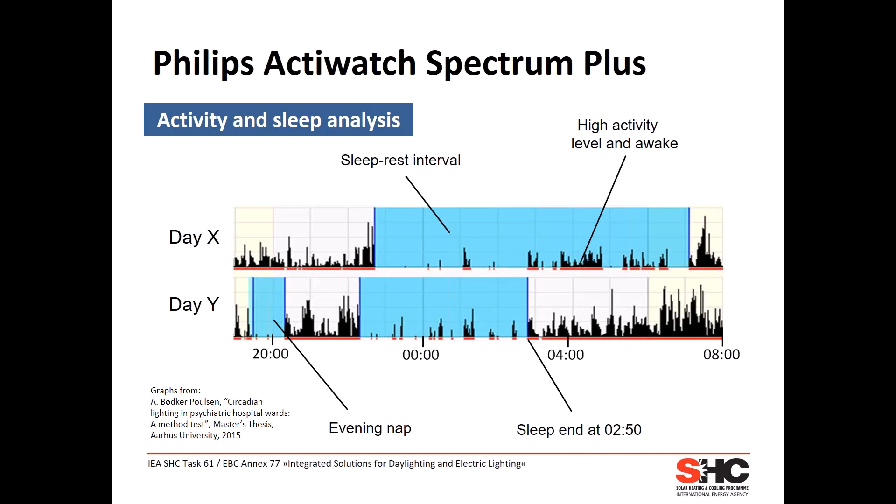One example we had was a person sitting on an exercise bike for quite a while, almost 3 hours, moving every body part except the wrist holding onto the handlebar. Only because one of the nurses observed this person for a period of time did we know the person was not sleeping, which the software had suggested, but was actually on the exercise bicycle, with the hand not moving because it was fixed to the handlebar.

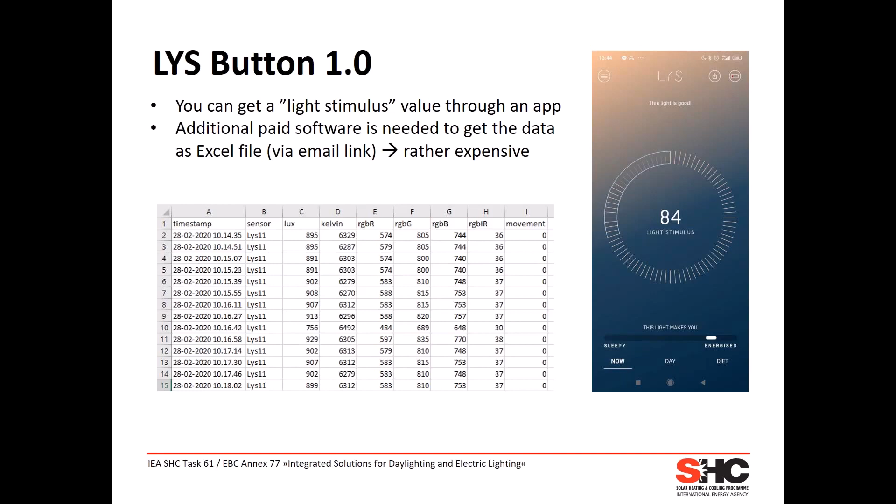On a mobile phone screen you can get a light stimulus, but we don't really know what the value shows. If you want more data, for example the RGB and infrared channels and color temperature, you need to buy quite expensive software for that. We can also see that calibration of these devices is rather difficult; different LYS buttons measure very different levels.

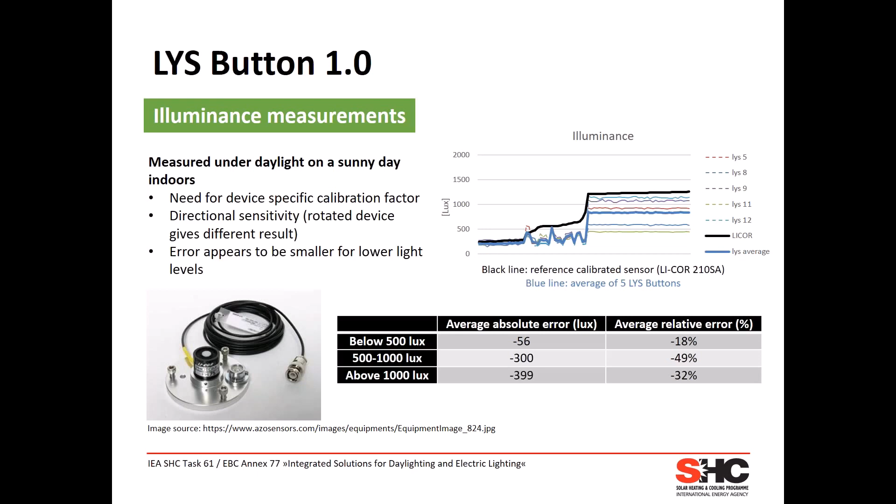And if you turn them around on your shirt or something like that, you get very different values again. Color temperature is one of the good things with that.

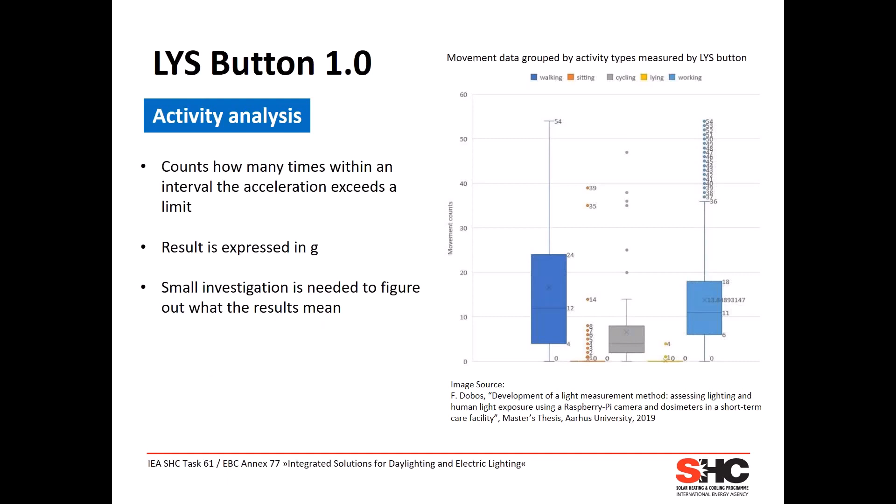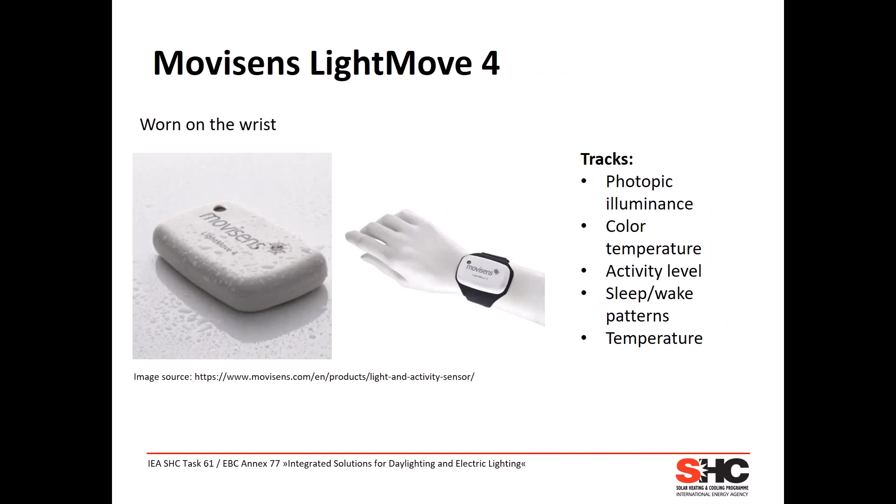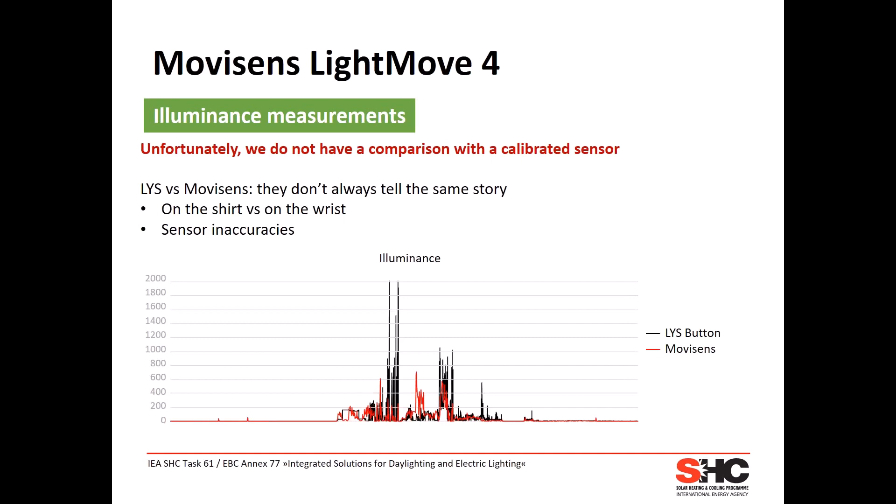They're rather close. In terms of activities, it measures something in relation to acceleration, expressed in G figures. The Movisens was also worn at the wrist, and it covers photopic illuminance, color temperature, activity level, sleep-wake patterns, and temperature. We also compared it with the LYS button, and they were quite different, although theoretically they should measure the same kind of activities.

When you try to link it with your activities and what it's recording, it's a good idea to also have a diary where you write down what you were actually doing at that particular time, because with the Movisens also being worn at the wrist, this can be quite misleading at times.

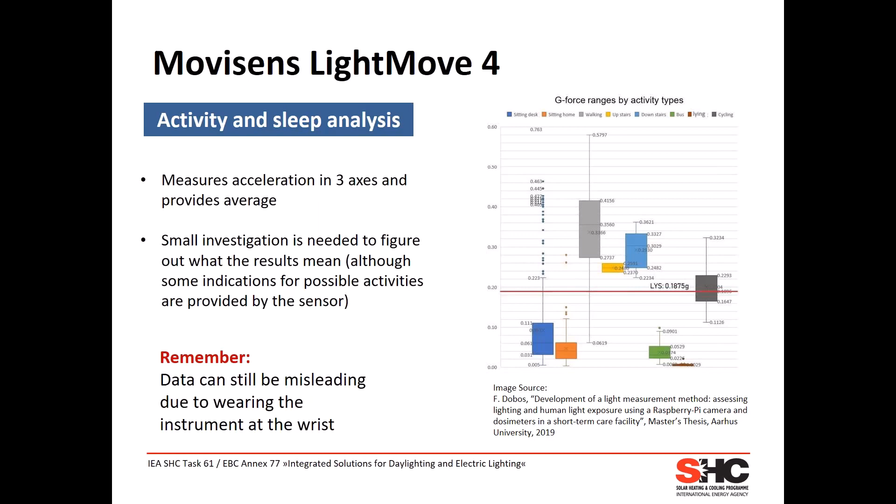So some of the problems we've found are that light measurements are not always reliable. Markvart et al. have found that the differences can be up to 60% for the same exact type of ActiWatch, and that matches quite well with our experience, that we have very large differences between the same type of equipment.

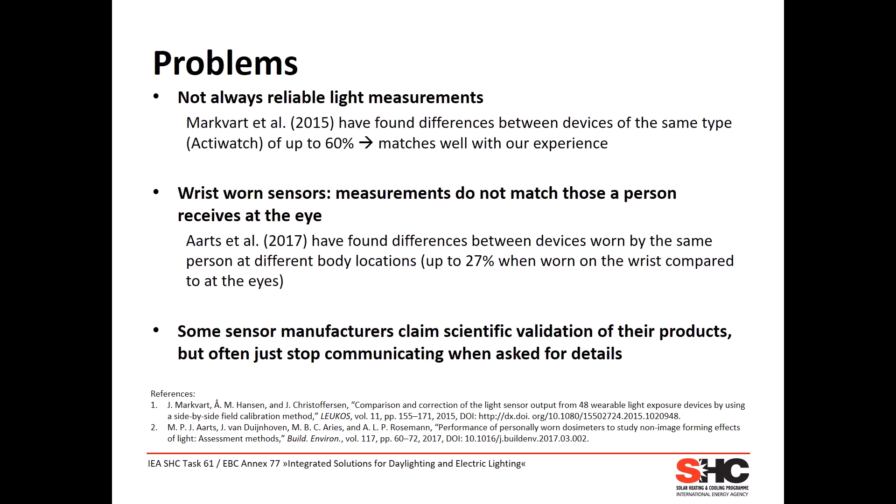With wrist-worn sensors, it does not match the light levels that the person actually receives at the eye. There were also around 27% differences between what is recorded at the eye and what's recorded at the wrist. Some sensor manufacturers claim scientific validation of their products, but they stop communicating when you ask for some of the details, so it's a bit tricky to actually confirm that.

So what do we recommend? If you can, use more than one type of measuring device and compare the results. Try to calibrate all the instruments before you use them against a calibrated sensor, because it's not supplied by the manufacturers. As researchers, we would be very prepared to work with manufacturers on developing some procedure for that, but that may increase the cost of the devices.

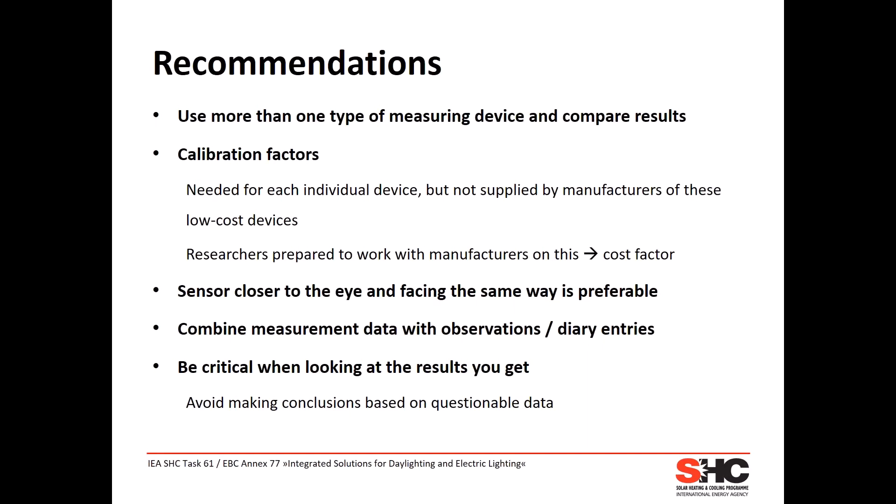We should select sensors which are closer to the eye and facing the same way, rather than things at the wrist, which might also be covered by clothing at times. We should try to combine measurement data with observations or diary entries, and we need to be extremely critical when looking at the results we get. So avoid making conclusions based on questionable data unless you can confirm it with some other aspects. Thank you very much.